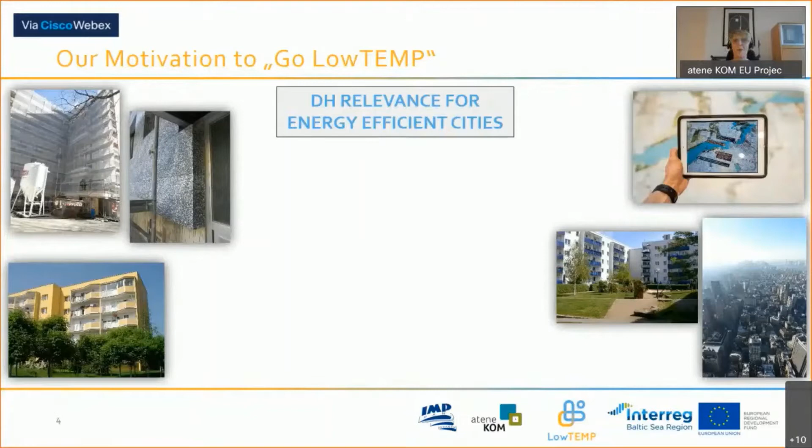But what we wanted to do is to look at pipes. We really wanted to focus in this project on the relevance that sustainable heating supply has for buildings and for cities.

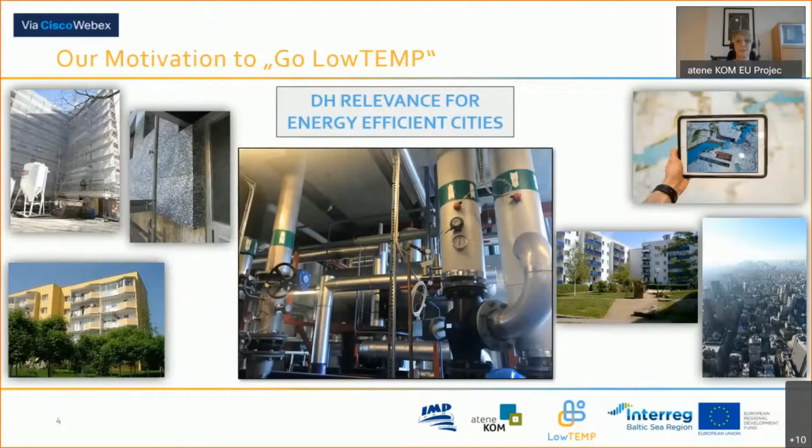Who supported this idea of doing so? Our supporters, that is the Interreg Baltic Sea Region program. A lot of you are active in the European or cooperation sector, so you may know Interreg Baltic Sea Region. This is the geographic focus, you see here the program area. And why are they supporting projects like LowTEMP?

Because they would like the Baltic Sea region to be more innovative, more accessible, and more sustainable. They do this in 4 thematic priorities: innovation, transport, and EU strategy. And our priority is the priority natural resources. And within this priority, we have the objective energy efficiency. So the project is located within this objective.

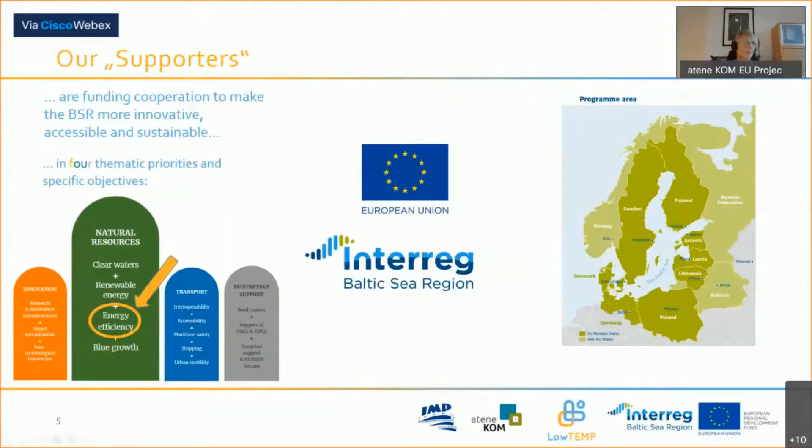I would like to introduce the whole team. Our partnership, 19 partners, I already mentioned it on the slide before, from 9 countries. And we also have 19 associated partners. These are partners that support our activities.

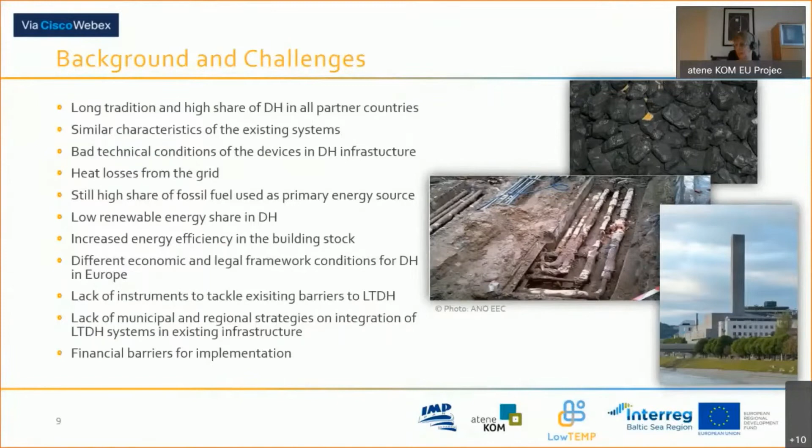So based on these challenges, what did we aim to do? We wanted to collect and provide information and data on low temperature district heating and district heating in general.

We wanted to assess environmental and economic benefits of the systems. We wanted to develop guidelines and strategic approaches on how to plan, finance, install, and manage low temperature district heating systems. We wanted to realize pilot measures.

We wanted to do something tangible that fits to the local and regional conditions in the partner countries. And we wanted to increase knowledge, very important, on smart district heating systems and the installation of such systems.

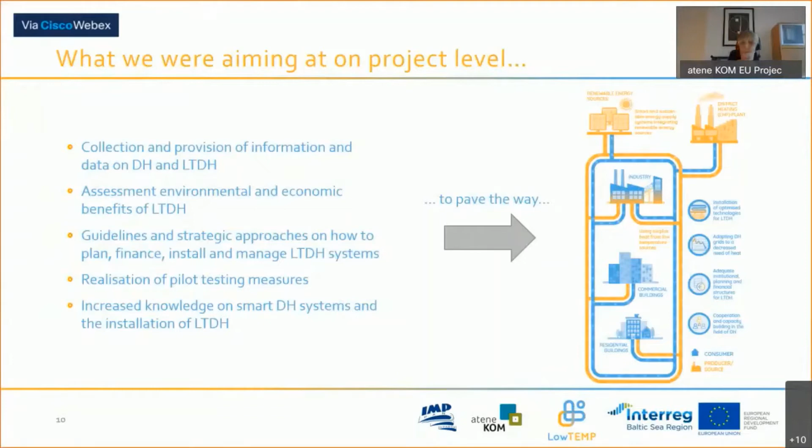And these efforts are supposed to pave the way to fourth generation district heating, which you see here in this graph. Now, last slide from my side.

How did we want to achieve these aims? We developed a district heating knowledge platform to collect information and data. We developed various sustainability assessments to assess the benefits, economic and environmental.

We implemented or realized energy strategies for various municipalities. We implemented pilot measures and did an analysis of the economic viability and effects of low temperature district heating, also developed business models. And we did capacity building via a training program developed in the project.

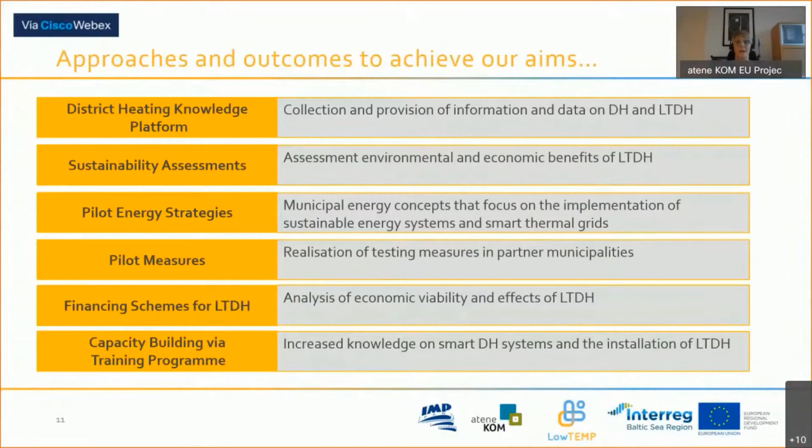At this point, I think I'm going to hand over to Adam.

With this introduction of our motives, we would like now to proceed to the content of our project and our investigation. As is normal, we first started to learn what has been done up to now, and I will focus in my presentation on what we have learned about existing solutions for fourth generation low temperature district heating.

A very important issue, already mentioned by Georg, is that we couldn't switch by just clicking a system from the old third generation type to the fourth generation. We need a kind of roadmap for how to reach this level of low temperature district heating.

At the end of my presentation, I will shortly describe the solution developed during our project, and point to the timetable for when the solution will be presented to you.

If you look at this graph, you will see that the temperature of your district heating can decrease with increase of energy efficiency of the building. So if energy consumption in the building is decreasing, we can also decrease the temperature of the network. This was studied in Sweden by E.ON.

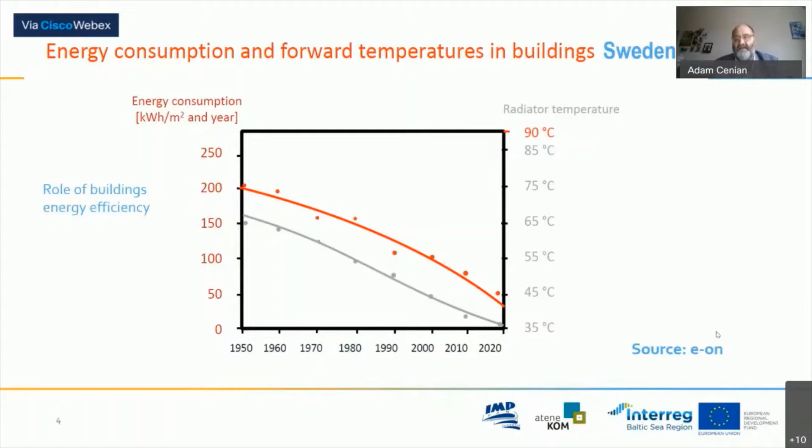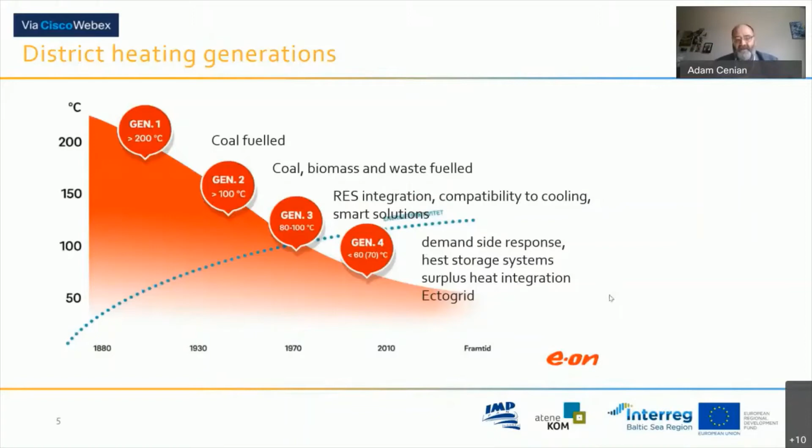Eventually, with renewable sources integration, we can arrive at the solution of the fourth generation. In the future, this development will focus on demand side response, heat resource storage systems, surplus heat integration. This was done, for example, in the E.ON solution Ectogrid, which I'll shortly mention.

So what are the benefits of low temperature district heating grids? Firstly, the low temperature reduces heat losses, which is very important for increased efficiency. Then we can, of course, much more easily include renewable energy sources. We can also include low temperature waste heat or surplus heat, which will be presented later.

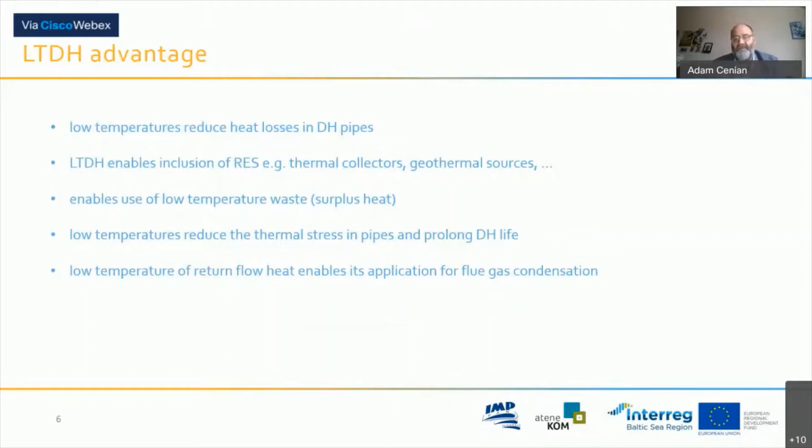Another issue is to reduce thermal stresses of pipes, which helps prolong district heating lifespan. And finally, low temperature of the return flow enables better application of these low temperature flows to flue gas condensation.

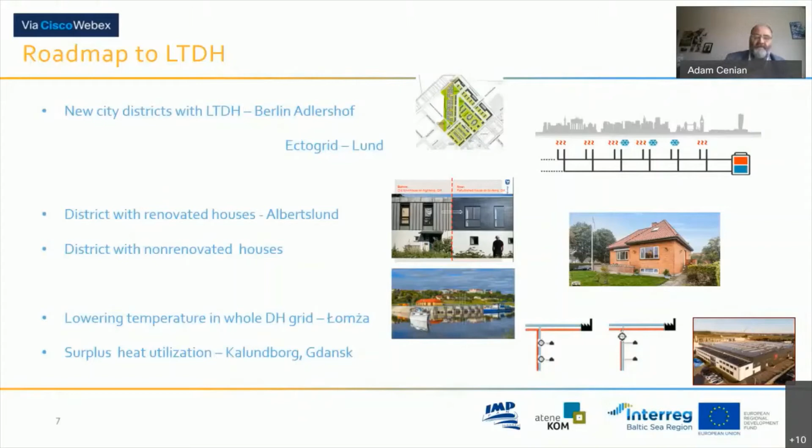I will now try to show you what we have learned during this first process on this issue. It means new city districts, which is a solution for a new completely system. I will show you an example from Berlin-Adlershof and Ectogrid Lund. Then I will show another road related to existing houses, one which are renovated, after renovation, another done in Denmark on non-renovated houses. Then I will show another issue of lowering temperature in the whole district heating grid - this will be a Polish example in Łomża. And then I will speak shortly about examples of surplus heat utilization.

A very good example we have seen in Berlin when visiting Berlin-Adlershof, the investment done by BTB Berlin. We have seen the introduction of low temperature district heating into a greenfield investment, 62 energy efficient buildings with 15 watt per square meter power need, including some low energy and 3+ energy buildings, which means some buildings produced their own heat. This can be introduced by bidirectional connection to the heat network, and can later, in a 2-year period of clearing, be used when the need for heat is larger than in summer. This is provided by BTB, this clearing, and it's a very generous 2-year period of clearing which helps the small producer use their own produced heat in this famous scheme of prosumers.

This low temperature district heating was linked to the existing district heating and its return flow, with a 60-degree supply temperature to the low temperature district heating and 40 degrees in return. It was estimated that 65% of primary energy was saved in this way.

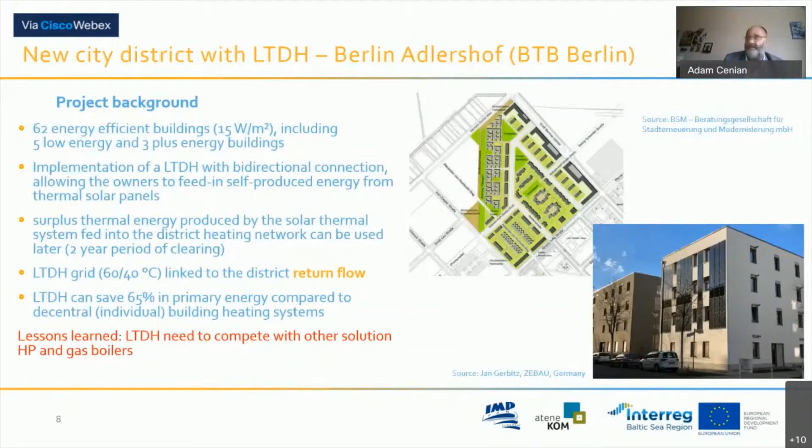A lesson learned which was very important for us, for a new investment in such a greenfield situation, is the competition with other solutions like heat pumps or gas boilers. Such an investment needs very careful planning and also work to encourage citizens to take part in this solution.

A very interesting solution is proposed by E.ON, related to the system of connecting heating and cooling. You see here two lines of district heating temperature, one for cooling purposes and one for heating, and both of these lines work at a temperature between 6 to 30 degrees, depending on the time of year. Usually the difference between the two is about 10 degrees, and the heat pumps use the temperature from the hot line when they need to warm, and the cold one when they want to cool.

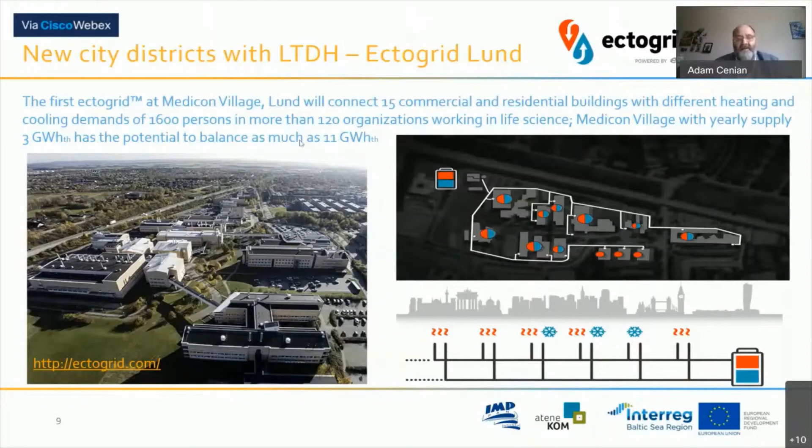By such a balancing procedure, they can save almost 11 gigawatt-hours per year, and the whole system of buildings presented here in the photo uses only 3 gigawatt-hours thermal per year.

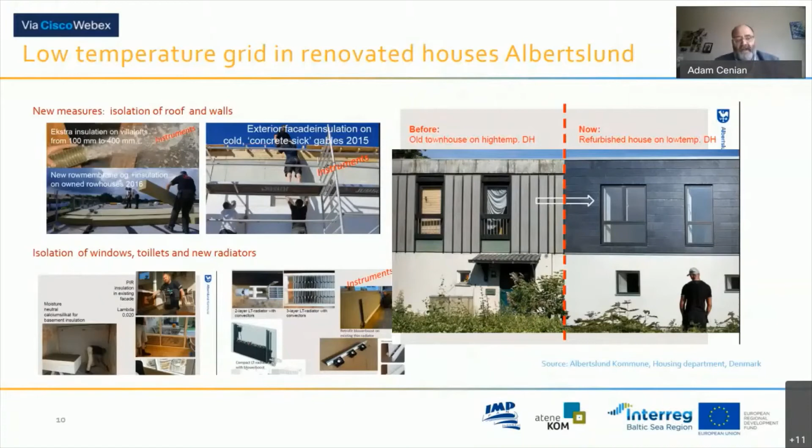Another way to introduce low temperature district heating on this roadmap is to renovate the buildings. You can see here the buildings before renovation in Albertslund and after renovation. The renovation took into account insulation of roof and walls, and of course insulation of windows, toilet, and new radiators. The whole idea of low temperature district heating is presented very nicely here.

When we have a district heating grid supplying houses with 57 degrees, after the heat exchanger 52 degrees goes to the radiators. From the radiator it goes to the floor heating system, and the temperature coming back is about 30 degrees - quite a nice temperature drop, which means efficient energy and heating supply.

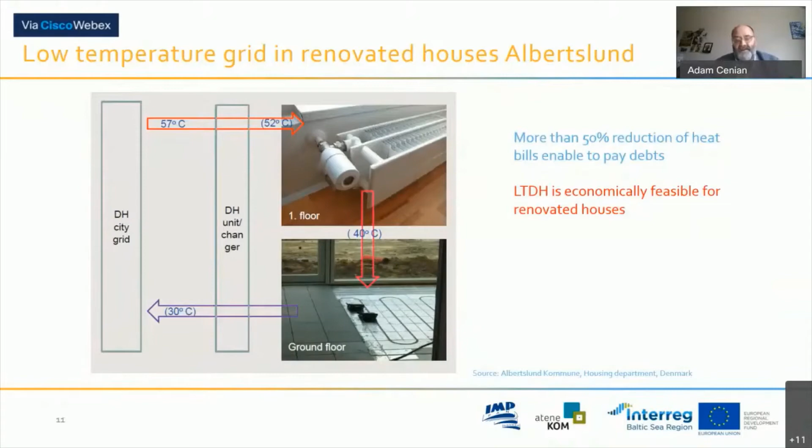It was found that a 50% reduction was accomplished in bills paid by the customer, so we have learned that this low temperature district heating is economically feasible for renovated houses. It means we can pay our debts by such a solution.

Of course, the task to renovate buildings is huge, and we couldn't probably do it in a few years. So the question formulated by our Danish colleague is: what about the not-refurbished cities, the not-refurbished houses? Especially in the case of the district in Sonderby, they found that after exchanging the old and inefficient piping, they can decrease heat losses from above 40% to 30%, and the temperatures supplied were around 45-50 degrees to the house, with a return temperature above 20 degrees. So we learned that this solution is feasible even for non-renovated houses with floor heating.

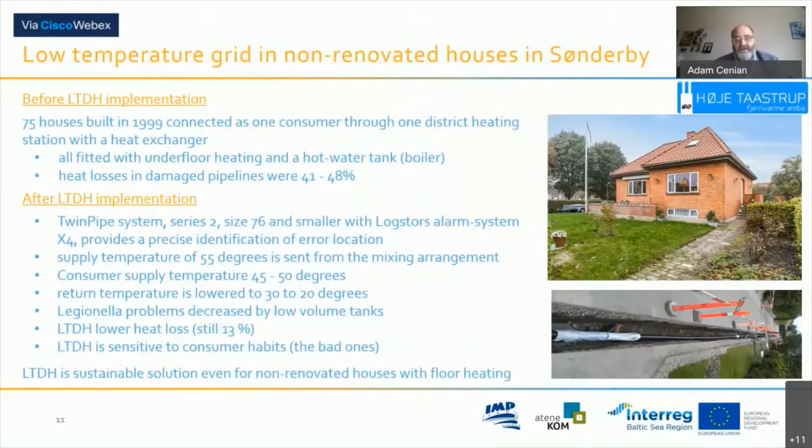Another interesting solution was shown to us by our colleague from Warsaw Technical University, Dr. Dzierzgowski, who introduced a very interesting experiment on a whole city network in a city in the eastern part of Poland.

Verified heat demand, 73 megawatt thermal, 860 substations, district heating length of 160 kilometers, heat losses about 12%. The goal was to lower the temperature by 2022 to 89 and return 48, and decrease heat production from coal from 100% to 11% in 2022.

The first step was very crucial. Generally in the eastern part of Europe, many houses are renovated, but energy demand has not decreased enough because there was no regulation done in existing substations. After such regulation, we can decrease mass flow by 55%, increase temperature drop to 43%, and decrease heat consumption in buildings by even 30%.

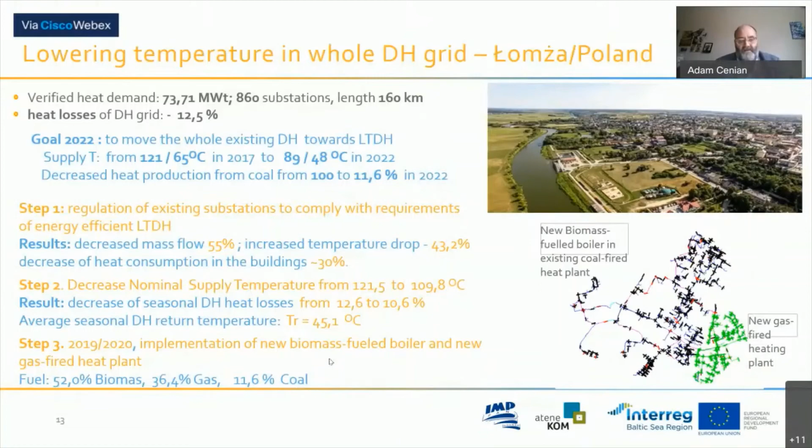This must be done in each building, and it was done in Łomża, with very interesting effects. The temperature was decreased to 109, and heat losses decreased from 12.6% to 10.6%, with average seasonal district heating return temperature of 45 degrees. In the final stage, new biomass-fired boilers and a new gas-fired heat plant were introduced, which can decrease coal consumption to 11%.

The final thing which we have learned is also the surplus heat.

Here you can see the example in Hamburg. Hamburg is the headquarters of the Aurubis company, which produces copper. During copper production, you release SO2, which can later be converted to sulfuric acid. This final process is exothermic, so it releases heat, and one such line already supports 18 megawatt thermal for HafenCity East.

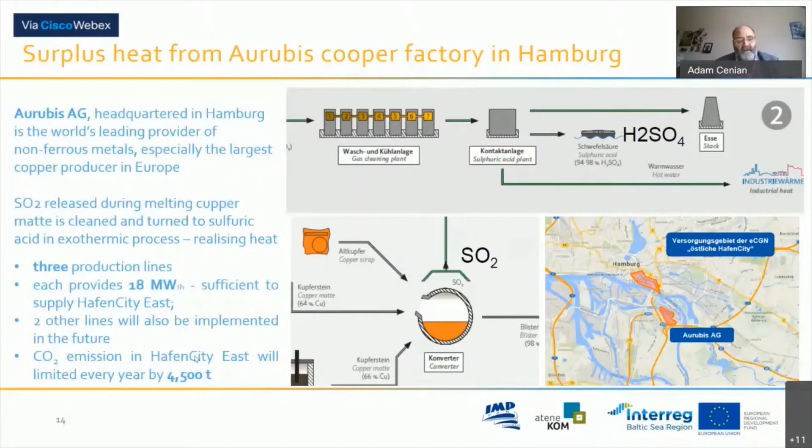Two other lines will be introduced in the future. Even this one line permits a reduction of CO2 emissions by 4,500 tons.

Another solution we studied in Poland is the local utilization of surplus heat in a company which uses a soldering furnace for heater production. One such furnace, about 630 kilowatt thermal, gives surplus heat at a temperature of 70 degrees. It can be used for space heating, ventilation, and domestic hot water preparation at different temperature ranges, with about 40% of the heat used for heating purposes.

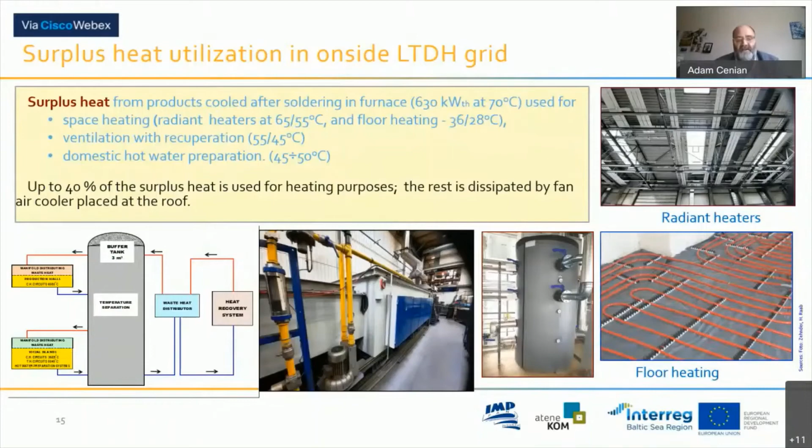You can see that 5 years is a simple payback period. We are just under investigation of this example, and we hope to get proper results soon.

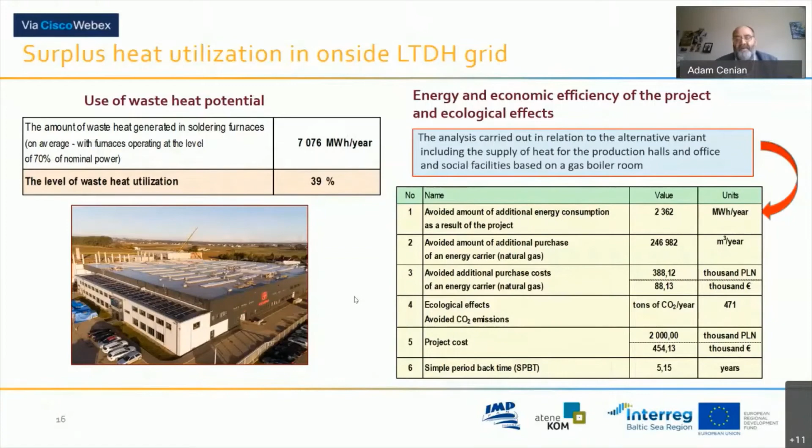This surplus heat can be used locally, but it can also be considered for transport over far distances. Such a discussion has been done in our partner country, in Kalundborg City, where they questioned what can be done with a big amount of surplus heat at low temperature, about 20 degrees, and how far it can feasibly and economically be transferred to other citizens. It was found that even a 20-kilometer line can pay back in 12 years, which is a very good result.

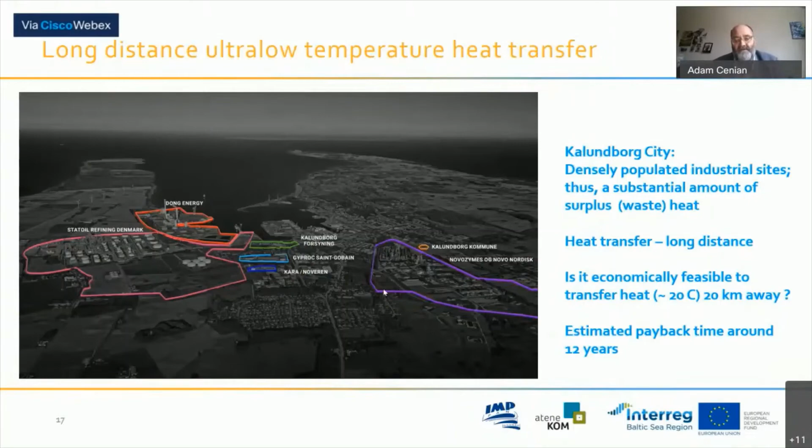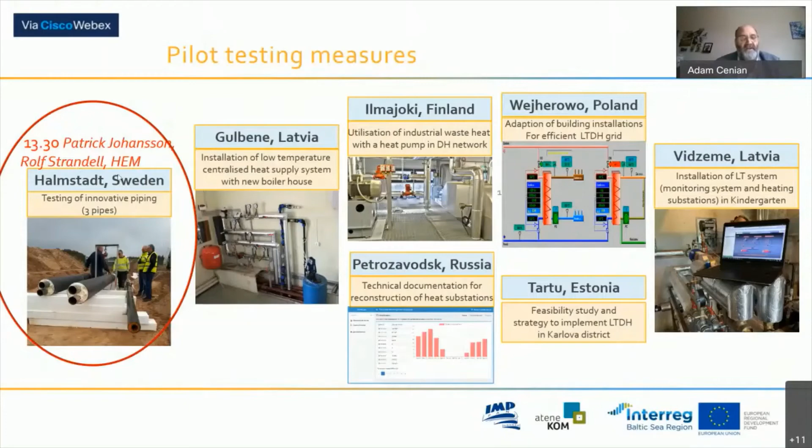On the basis of this knowledge, we propose new pilot testing measures. You can see here the different pilot measures that have been checked. After lunch, you will see a presentation on an innovative piping system in Halmstadt, presented by Patrick Johansson and Rolf Strandell at 1330.

As mentioned by Britta, we have also been working on the development of strategies. You will see three different lectures: our colleague from Cottbus University at 1310 about pilot energy strategies, our colleagues from Riga Technical University speaking about sustainable assessments, and strategic information about financing schemes given by Cecilia Tapper from the Sustainable Business Hub in Sweden.

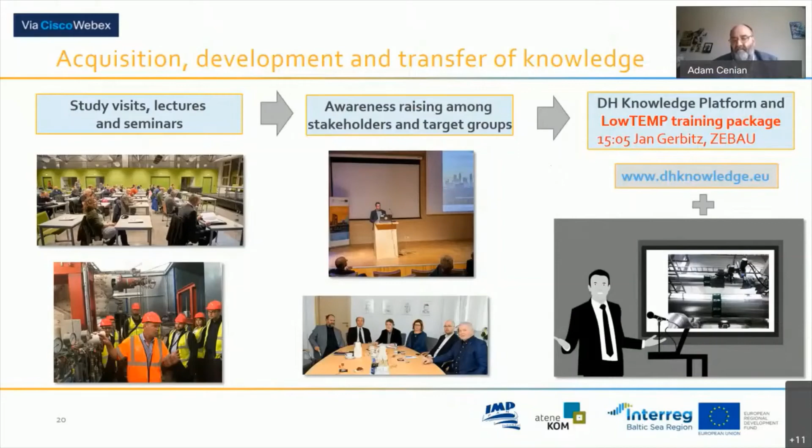In the last slides, we would like to present, after having shown what motivated us for the project, what has been implemented, what we learned, where we go, and what the future will be. First of all, some conclusions after 3 years of project implementation.

Within our project, district heating grids have been confirmed as essential infrastructure for cities in the Baltic Sea region, being beneficial for various stakeholders, our so-called target groups in the project: municipal authorities, planners, and also of course the consumers. At the same time, district heating has been acknowledged as a sustainable and future-oriented heating supply. Of course we knew about this, but all the project activities confirmed it to us.

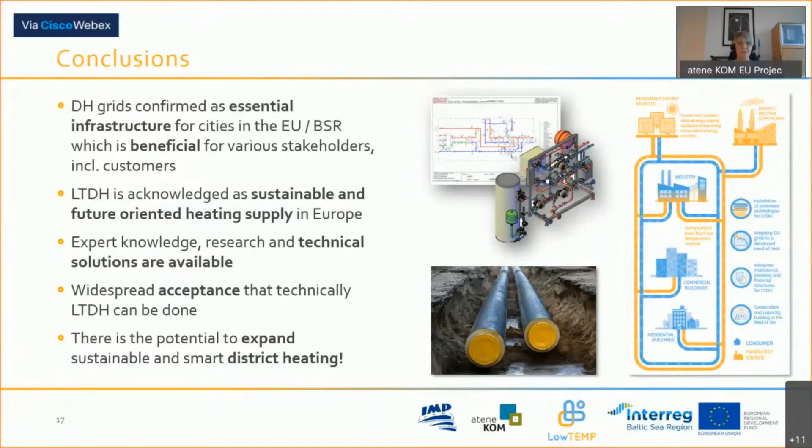What has been confirmed is that expert knowledge, research, and technical solutions are available. Enormous research has been done, and acknowledged universities in Denmark have published so much about smart 4th generation and now 5th generation district heating systems. So this is available. The knowledge is there with the experts. And with this knowledge, a widespread acceptance has been achieved that technically it can be done. Low temperature district heating is possible. So there's the potential to expand sustainable and smart district heating.

But there is a but. What we have seen is that so far, low temperature district heating is very seldomly installed in Europe, especially in the Eastern European countries. Adam just presented some remarkable installations, pilot projects we have seen, but we had to search them. Being frank, we had to search them. It's not that you just go to a country and visit 3 or 4 smart and sustainable district heating grids. That's not the situation.

There's a low level of investment in low temperature district heating due to financial concerns. Investors need to acknowledge that it's a long-term investment. Yes, it's a long-term investment, but with very positive environmental aspects. We will speak about this in detail in the afternoon.

Also, new approaches on how to use waste heat are needed. And there is a lack of knowledge and strategies on how to implement these systems with municipal and regional stakeholders, so their knowledge needs to be increased. Knowledge with the experts is there. Knowledge on the regional and local level has to be increased.

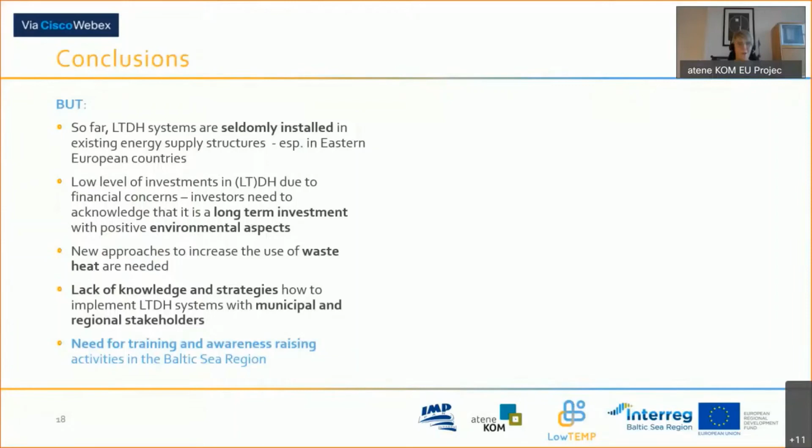So our conclusion: there is a need for training and awareness raising activities in the Baltic Sea region, and we have done this in the project. Jan Gerbitz will present the training program we have developed. But then another but - there needs to be done more, and this is our outlook into the future.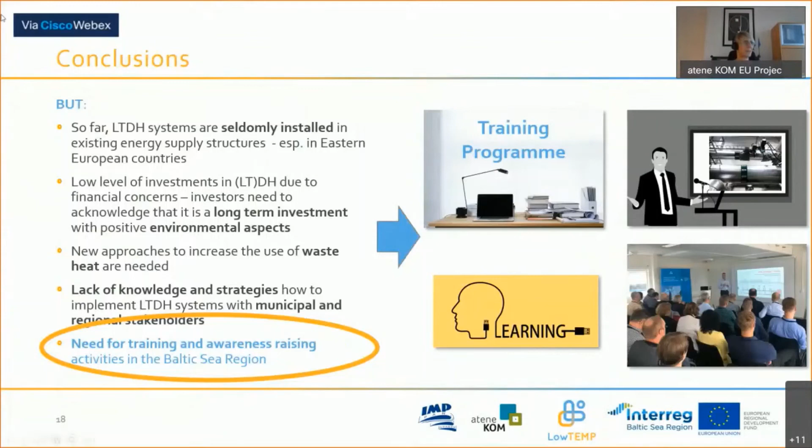We, the LowTEMP project, are going to continue capacity building, and we're going to do this with a so-called extension stage project. So we get the possibility for 1 year to continue our work with 10 LowTEMP partners. The LowTEMP 2.0 project is based on the capacity building results of the main project and responds to this large demand of knowledge.

What are we going to do in this project? We're going to adjust the LowTEMP training material to the national conditions of the participating 9 countries. In this context, we're also going to translate the training material, and we're going to develop e-learning courses. When I wrote the application, when we developed this project a year ago, there was no COVID, but also then we thought, okay, e-learning is good. We cannot only do on-the-spot seminars.

In the meantime, I think these e-learning courses are very, very important because virtual and remote meetings will be the form of meeting, at least for a few months, I guess. But at the same time, we also planned national training seminars and promotional events in the countries. So this is LowTEMP 2.0. Tomorrow we are going to have the kickoff of this project.